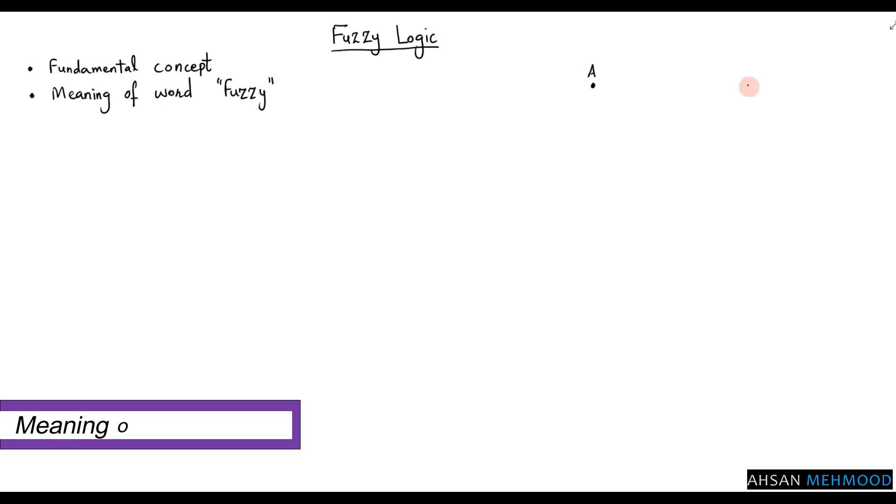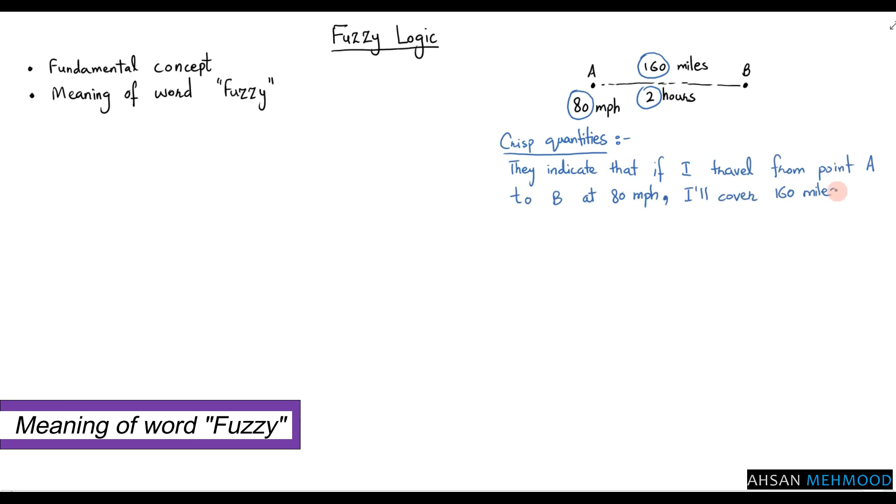Consider the following scenario. I am driving a car from point A to point B at 80 miles per hour. If the distance between points A and B is 160 miles, it will take me 2 hours to travel that distance. These quantities, that is 80 miles per hour, 160 miles and 2 hours, are all precise or crisp quantities. Crisp values or quantities tell us that if I travel from point A to point B at 80 miles per hour, I will cover the 160 miles in exact 2 hours. But in reality, it depends on the traffic situation, the road surface, environmental conditions, that is if it is snowing or if there is a sandstorm.

So in reality, if I am traveling from point A to point B and there is no traffic, it will probably take me around 2 hours to get from point A to B. If there is light traffic, it may take 2.5 hours. If there is heavy traffic, it may take 3 to 4 hours. If there is a lot of traffic, it will take a long time. These are not really exact statements. About is a vague term. How long is long and how short is short. These statements we regard as imprecise or fuzzy statements.

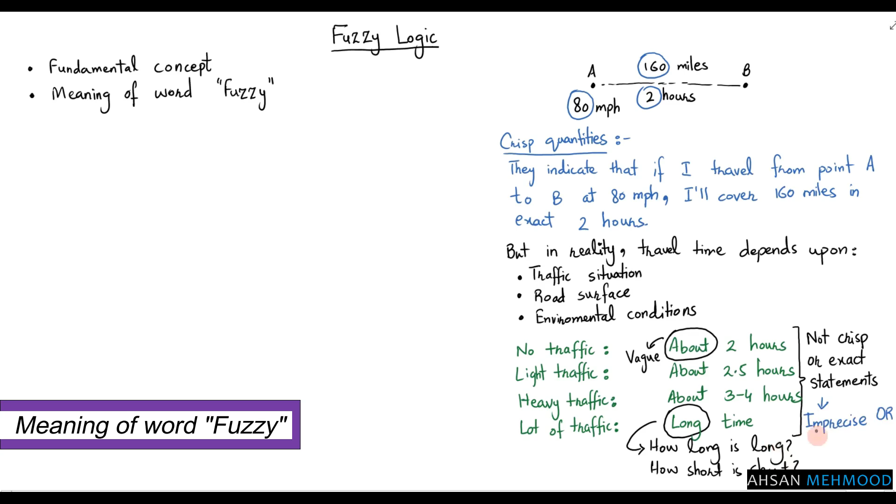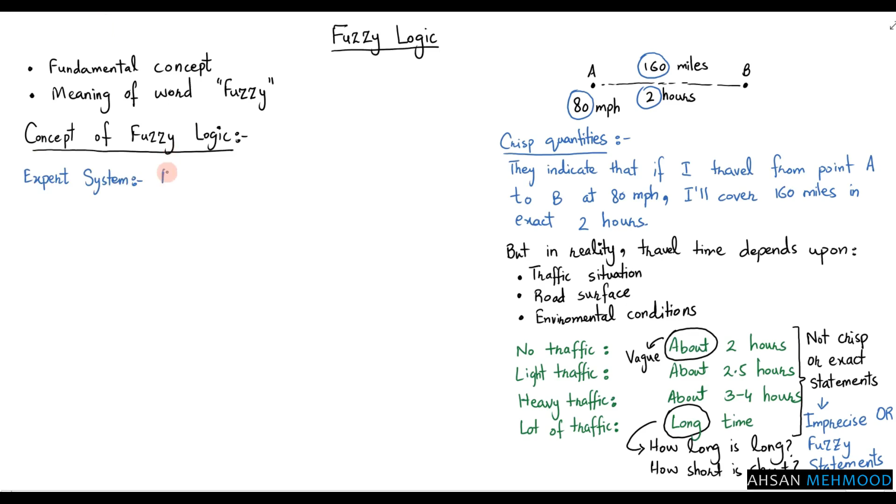Starting with expert systems is the best method to introduce the concept of fuzzy logic. In the context of control, an expert system is a computer software that mimics the behavior of a skilled operator.

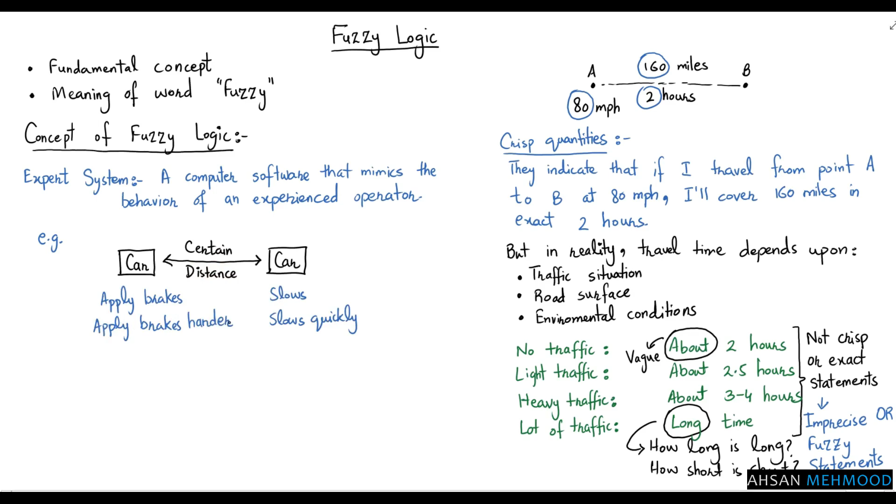For example, suppose you were driving a car and needed to keep a certain distance between your car and the car in front of you. If the car in front of you slows, you must apply the brakes. If the gap between your car and the car in front of you is shrinking quickly, you should hit the brakes more forcefully. You no longer need to model the car engine, drivetrain, or inertia to accomplish this. You know from experience that if the distance between your car and the car in front of you is shrinking, you should apply brakes proportional to that shrinkage.

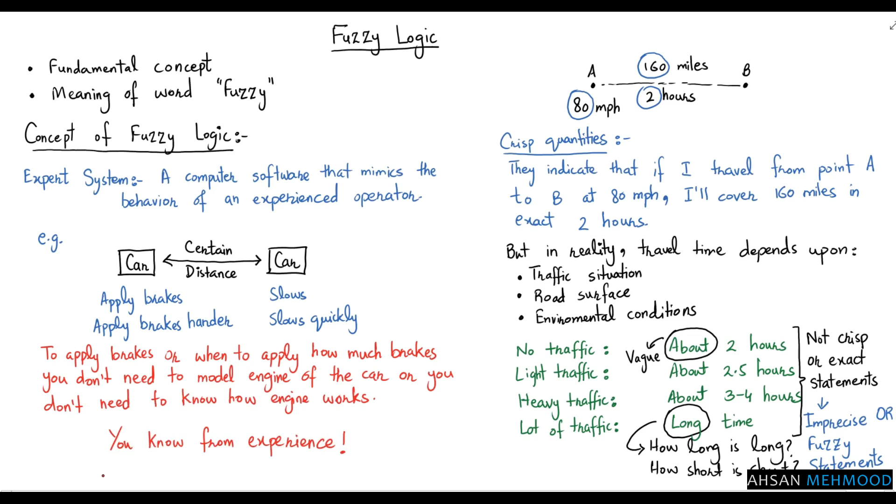Distance is one variable in this example, while the rate of change of distance is another. Your actions are based on these variables, and when you apply the brakes, you don't think about the engine model. You do it instinctively. Similarly, most processes in real life are controlled by skilled operators. Therefore, rather than modeling the car, we model the driver or experienced operator in an expert system to design the control for a system or process.

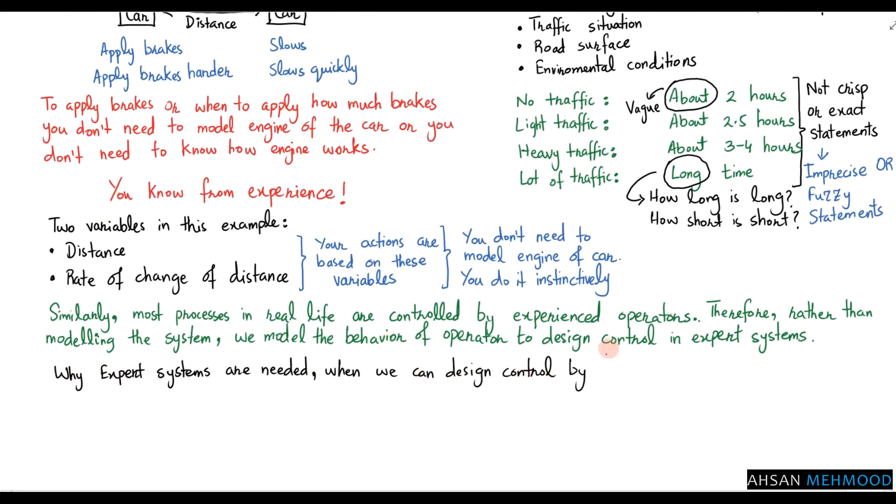Someone might wonder why expert systems are needed in control when we can design the system's control using its mathematical model. The answer to this question is that designing control for a system using a mathematical model of that system, such as a car engine, drivetrain, or other system, is not only time-consuming but also difficult to obtain in many cases. And even if it is obtained using some method, it contains errors and is affected by disturbances. Furthermore, many people lack the level of mathematical knowledge required to effectively model the system. Therefore, expert systems are used in control, in which rather than modeling the system, we model the behavior of operator.

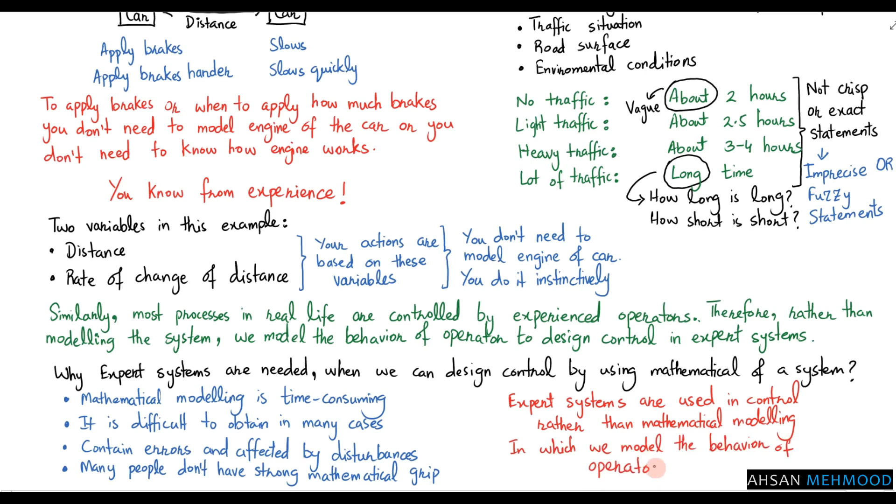So to summarize, most complex processes are controlled by human operators. Expert systems, rather than modeling the plant or process, capture the behavior or instincts of operator.

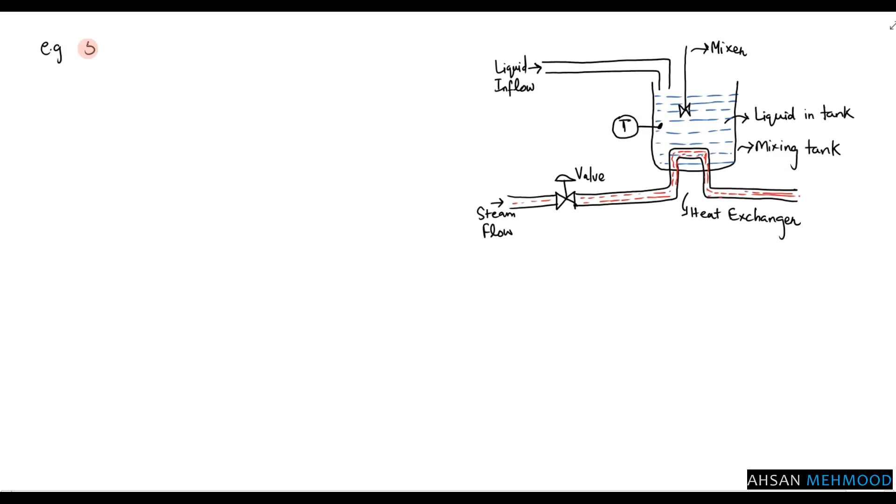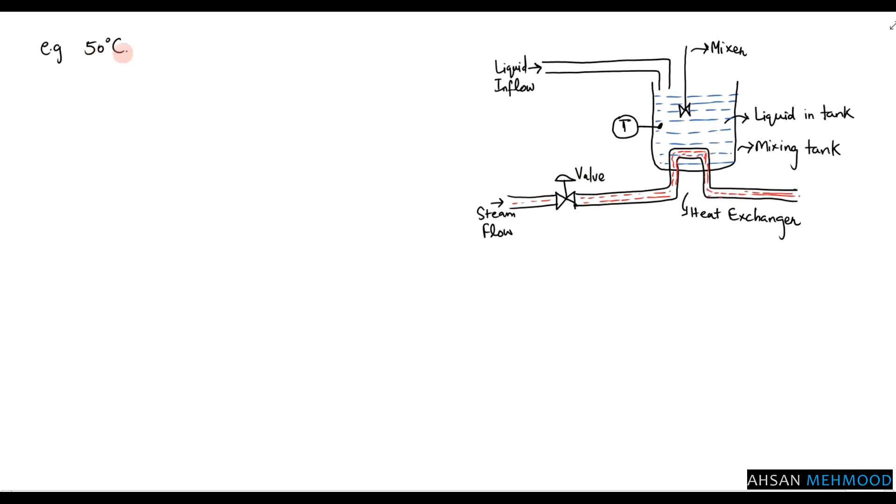I will explain this by considering an example which contains a mixing tank. We measure the temperature of the tank to keep it at a certain value, for example 50 degrees centigrade. To do so, we have steam flowing into the heat exchanger. If the temperature of the liquid in the tank is very low, we increase the flow of steam, which exchanges with cool liquid in the mixing tank, and its temperature rises to the desired value. When the temperature reaches the desired value, we close the valve.

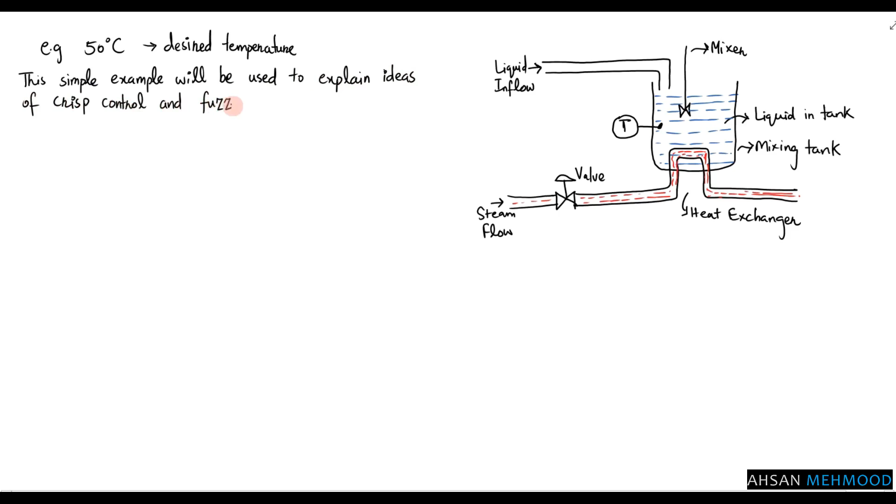In this video, we will discuss two methods of control, that is crisp control and fuzzy logic methods. And through this simple example, we are going to implement crisp control and fuzzy logic methods.

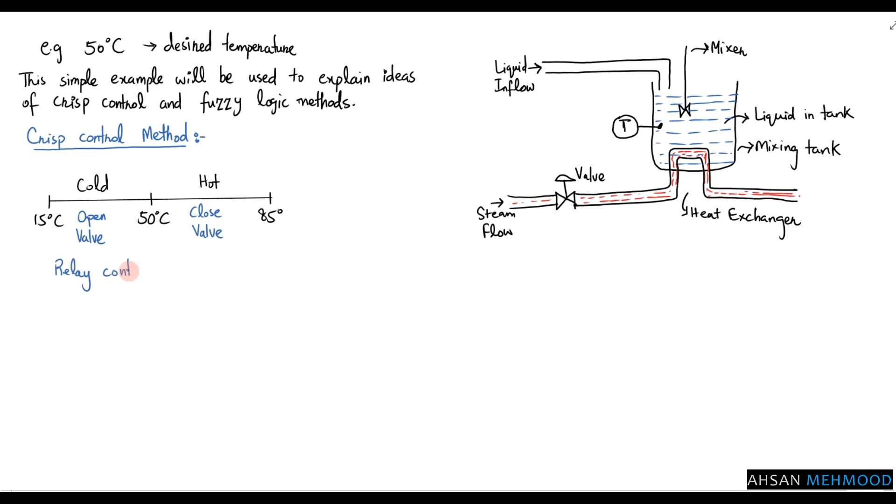Let's start with the crisp control method. If my preferred temperature is 50 degrees, I may say that anything below 50 degrees is cold and anything beyond 50 degrees is hot. If it is cold, we will fully open the valve, and if it is hot, we will fully close the valve. This is similar to our relay controller in that it has an open-close operation. These two simple statements can also be used to express this control action.

If T is less than 50, valve position is 100% or fully open. Otherwise, if T is greater than 50, valve position is 0% or fully closed. The disadvantage of such a controller is that the temperature of the tank will oscillate around 50 degrees in steady state and will not settle to a fixed value, causing the mechanical valve to wear out prematurely.

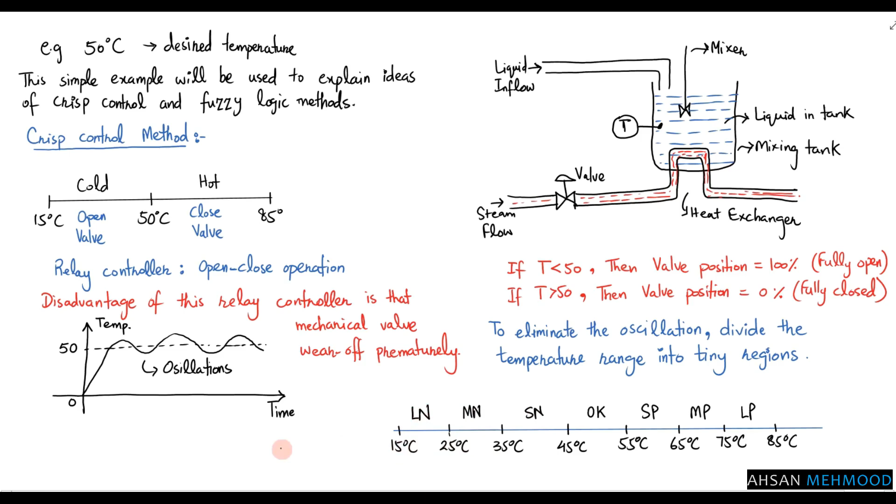To eliminate the oscillation, one method is to divide the tank's temperature range into tiny areas. For example, I can choose the 45 to 55 degrees range as the acceptable or OK range. The small positive region runs from 55 to 65 degrees. Medium positive region ranges from 65 to 75 degrees, while large positive region ranges from 75 to 85 degrees. Similarly, the 35 to 45 range represents a small negative region. Medium negative region ranges from 25 to 35 degrees, whereas large negative region ranges from 15 to 25 degrees.

In this way, we have developed a more sophisticated control strategy, in which the valve remains in its current position if the temperature is within the desired range. If the temperature is small negative, open the valve by 1 degree. If the error or temperature is medium negative, open the valve by 2 degrees, then 3 degrees, and so on. Close the valve by 1 degree if the present temperature is small positive, that is, the tank's temperature is a little higher than the required temperature. Close the valve by 2 degrees if the error is medium positive, and so on. So minus and plus refer to how far the valve is closed or opened.

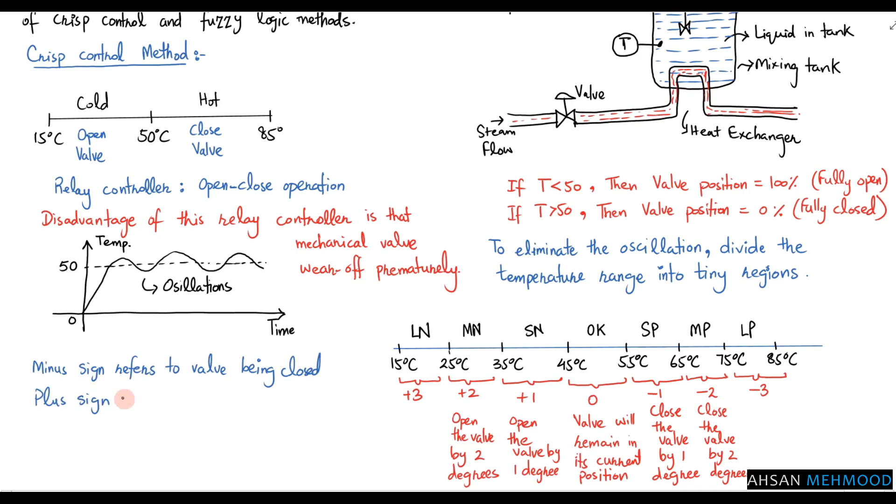Minus sign refers to the valve being closed, whereas plus refers to the valve being opened. It can also be expressed in if-then statements. In the previous case there were only 2 statements, but this case has many statements.

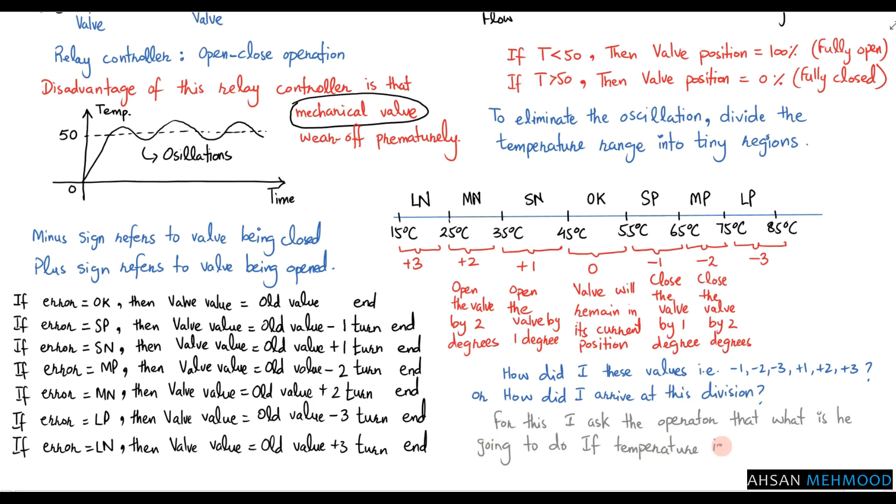In the whole discussion, our controlling variable is action on the mechanical valve. The question now is, where does this action originate? For this, I ask the operator: what are you going to do if the temperature is about 50 degrees? He will say, I am going to leave the valve alone, implying that the temperature is fine. But what if the temperature is between 55 and 65 degrees? He will say something like, I am going to close the valve by 1 degree, or minus 1. What if the temperature is between 35 and 45 degrees? He will say, I'll open the valve by 1 degree, that is plus 1.

Crisp control refers to the fact that each temperature value belongs to only one subdivision. For example, 69 degrees is a medium positive number and belongs only to this region.

By managing the degree of opening and closing of the valve, rather than totally opening or closing the valve, we may reduce the oscillations of the mechanical valve. This method is better than the relay controller method, however, it has a flaw. We will use an example to help us understand this.

The temperature of 24.9 degrees is in the large negative range, indicating a plus 3 action. Similarly, the temperature of 25.1 degrees is in the negative medium range, and the action is plus 2. So under crisp control, our controller will perform 2 different actions for 2 similar temperatures. But if you ask an experienced operator what he would do at these 2 temperature values, he will tell you that these are the same temperatures and that he would recommend only one action for both of them, perhaps plus 3 or plus 2.

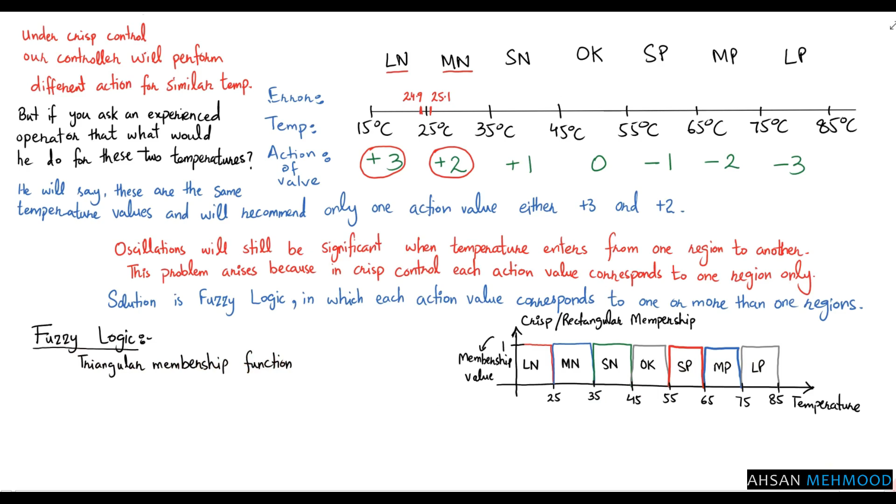Now let's have a look at what fuzzy logic is. We can also represent the previous crisp division in the form of crisp or rectangular membership functions. Crisp membership means any temperature value belongs 100% to one particular division. Therefore, each temperature has a membership value of 1 in the crisp control method. What we have learned so far is how to implement an expert system in the controller using crisp membership value.

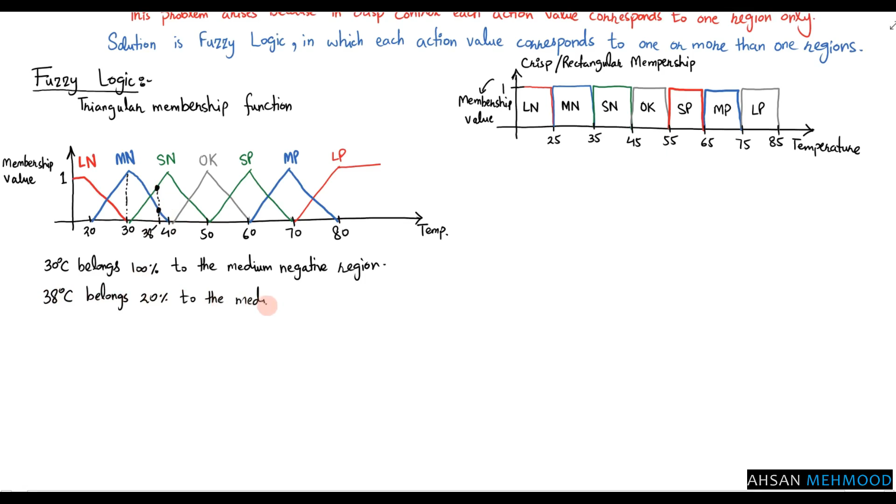For understanding the fuzzy logic controller, consider the triangular membership functions. In the triangular membership functions, the temperature of 30 degrees belongs 100% to the medium negative region, whereas the temperature of 38 degrees belongs 20% to the medium negative and 80% to the small negative regions.

Consider the case of two temperatures that were very near in values: 24.9 and 25.1 degrees. The temperature of 24.9 degrees belongs 49% to the medium negative and 51% to the large negative. Similarly, the temperature of 25.1 degrees belongs 51% to the medium negative and 49% to the large negative in the fuzzy logic controller.

In the crisp control method, if the temperature reading is 25.1 degrees, the operator would open the valve by 2 degrees. If it is 24.9 degrees, the operator would open the valve by 3 degrees. But under the fuzzy logic method, how do we calculate the action value of the valve for 24.9 degrees and 25.1 degrees, which fall into two regions?

To do so, we multiply the crisp control action value by the membership value of the triangular membership function. For example, control action for 24.9 degrees would be 0.51 times 3 plus 0.49 times 2, which equals 2.51 turns. Control action for 25.1 degrees would be 0.49 times 3 plus 0.51 times 2, giving us 2.49 turns.

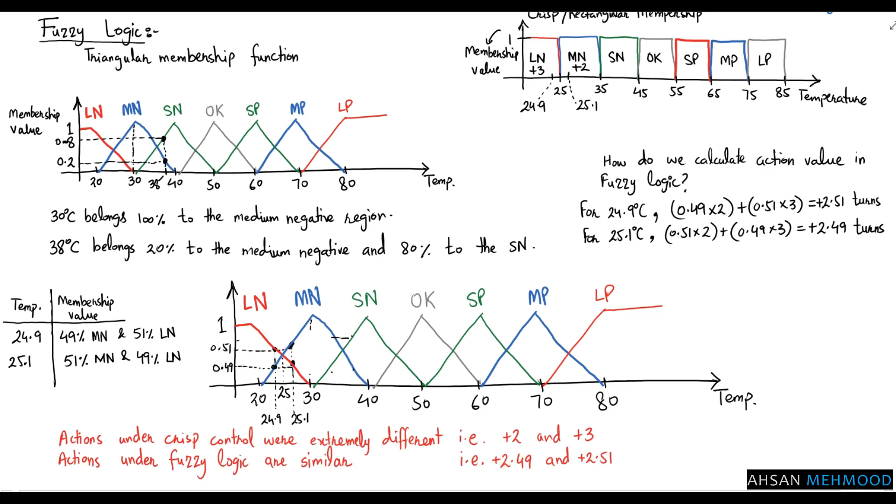Actions under crisp control were extremely different, that is 2 and 3. However, actions in fuzzy logic control are similar, that is 2.51 and 2.49. Triangular membership functions, in contrast to crisp or rectangular membership functions, give us similar actions for similar temperatures.

So what exactly does fuzzy mean in this context? In this case, fuzzy means that we enable the temperature to belong to two regions or groups instead of just one, with each group having its own membership value. For example, 24.9 degrees has two membership values: large negative 0.51 and medium negative 0.49.

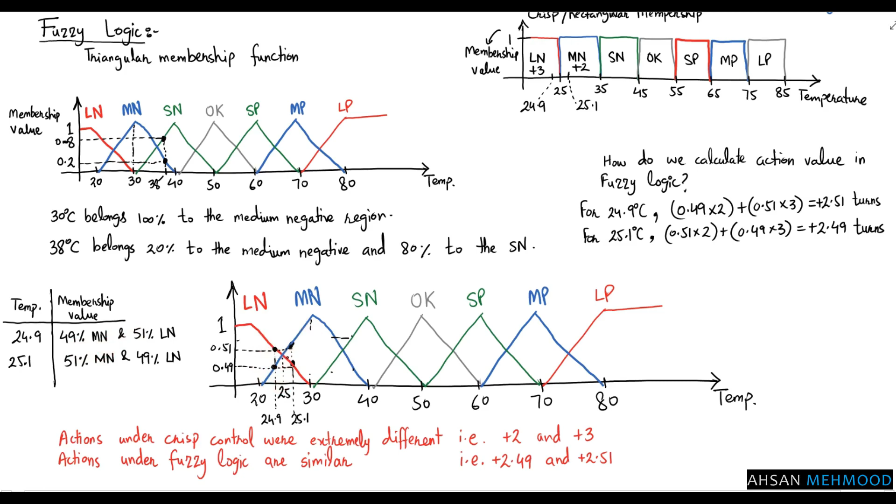These membership values were calculated here by intersecting vertical lines with triangular straight lines, solely for the sake of analysis. Computers are used to find membership values in practice, as they are difficult to find analytically.

We were able to solve the challenge of very different control actions for similar temperatures by using fuzzy membership functions, without increasing the number of rules and if-then statements. As a result, control action varies smoothly in response to temperature variations, resulting in minimal oscillations around the whole operating range.

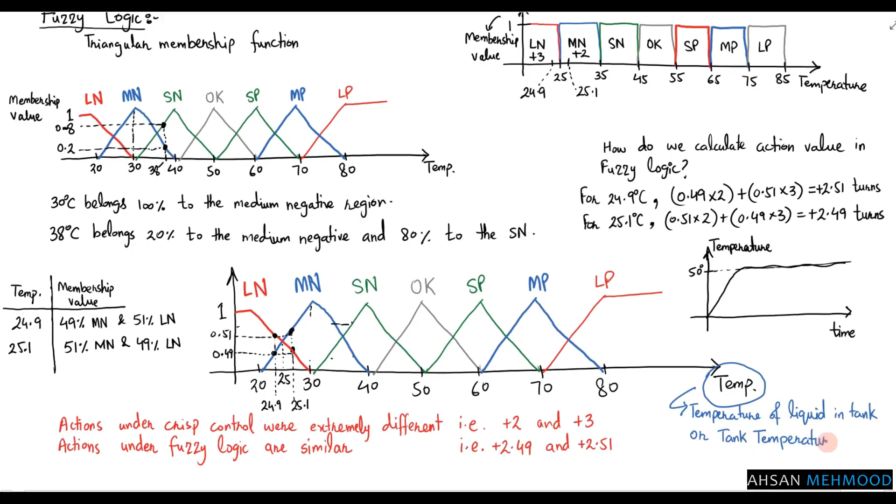So far, we have considered only one variable to decide the control action value, that is temperature of liquid in the tank, or tank temperature. While in practice, plant operators may use different variables to decide the value of control action. Now we will discuss an example in which two variables are used to decide control action.

We assumed in the previous discussion that the temperature of liquid pouring into the tank remains constant, but in reality it may vary on different days depending on external conditions. As a result, if the second variable is the temperature of the liquid flowing into the tank, or the inlet temperature, the operator may make different valve adjustments than in the previous example.

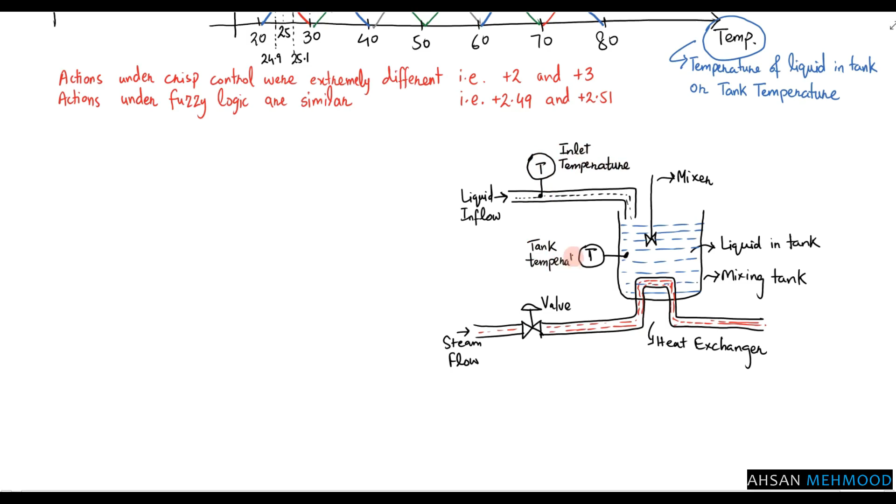If the inlet temperature is generally 15 degrees, but it is 25 degrees today, then less steam is required to raise the tank temperature. As a result, the operator can adjust the valve settings for each region as needed.

For example, if the temperature is OK, the valve position remains unchanged. If the temperature is small negative, open the valve by plus 0.5 degrees, as opposed to plus 1 degree in the preceding example. It is plus 1 degree for medium negative, whereas it was plus 2 degrees in the preceding case.

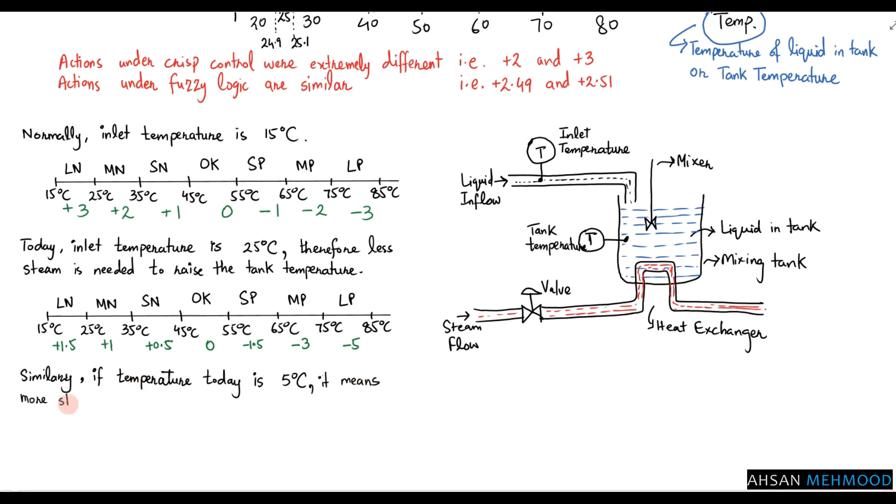If the current inlet temperature is 5 degrees, then more steam is required to raise the temperature of the liquid in the tank. As a result, the operator will alter the operation and increase the valve settings as seen here.

Because we now have two variables, namely inlet and tank temperatures, we must merge the rule bases of these variables to create a two-dimensional table.

To use fuzzy logic to calculate the value of a control action, we must first establish the crisp control values for these two variables.

To illustrate how this 2D table works for the crisp control method, suppose inlet temperature is 5 degrees and tank temperature is 30 degrees, so the action would be to open the valve by 3 degrees. If inlet temperature is 25 degrees and tank temperature is still 30 degrees, then the action would be to open the valve by 1 degree.

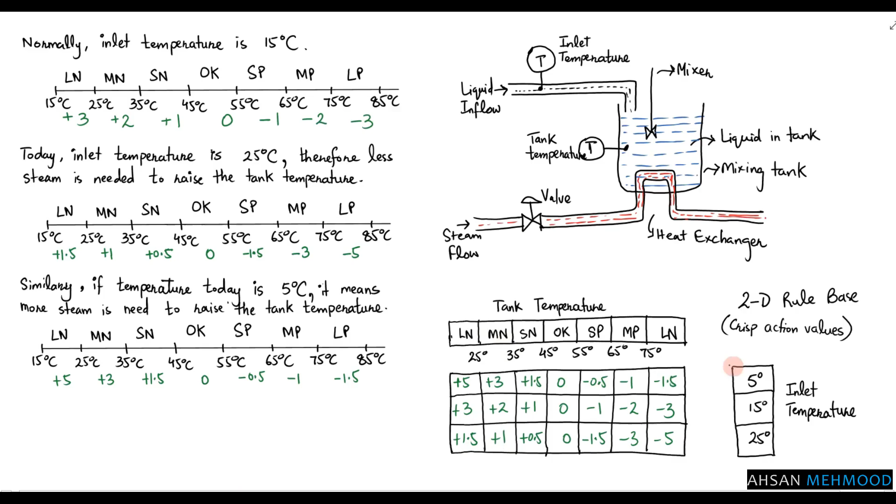Remember that we are using crisp membership values to calculate the control action of the valve, and the problem with crisp membership values is the same: for similar temperature values, the control action is drastically different, causing oscillations when the temperature value moves from one region to the next. We will employ fuzzy triangular membership functions to tackle this problem.

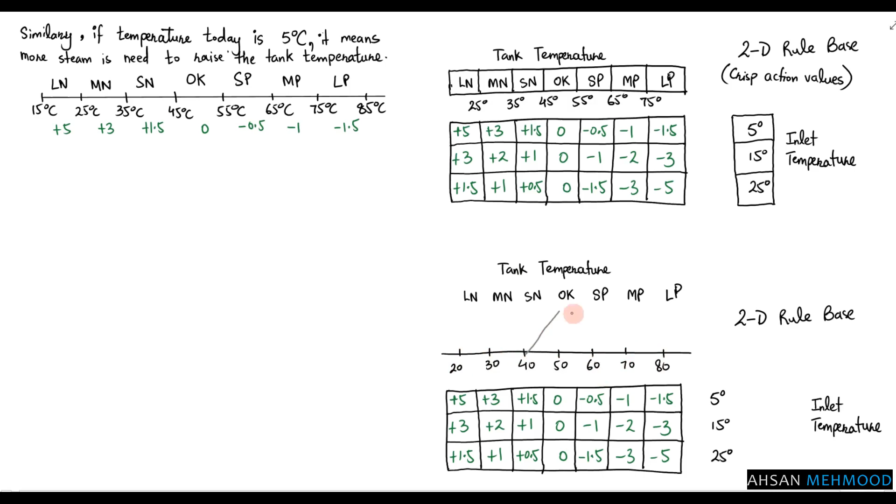For tank temperature, we utilize the same triangular membership functions as in the previous case, but for inlet temperature, we separated the entire region into cold, normal, and hot regions. A tank temperature of 30 degrees means 100% medium negative, 50 degrees represents 100% OK, and 70 degrees represents 100% medium positive.

Similarly, a temperature of 15 degrees is considered normal. A temperature of less than or equal to 5 degrees is considered cold, and a temperature of 25 degrees and greater is considered hot. The temperature in the middle has fuzzy membership values.

It was simple to decide control action value when inlet temperature was constant and these two rows were absent. For example, control action for 25 degrees is equal to 0.5 times 3 plus 0.5 times 2, or 2.5 degrees.

When we have two variables such as tank temperature and inlet temperature, the challenge is figuring out how to integrate these two temperatures to create a single control action value.

Consider the following scenario: the tank temperature is 64 degrees, which falls into the medium positive and small positive regions, and the inlet temperature is 12 degrees, which falls into the cold and normal ranges. So part of the table we need for these two temperature values is the intersection of these columns and the two rows, that is these four cells.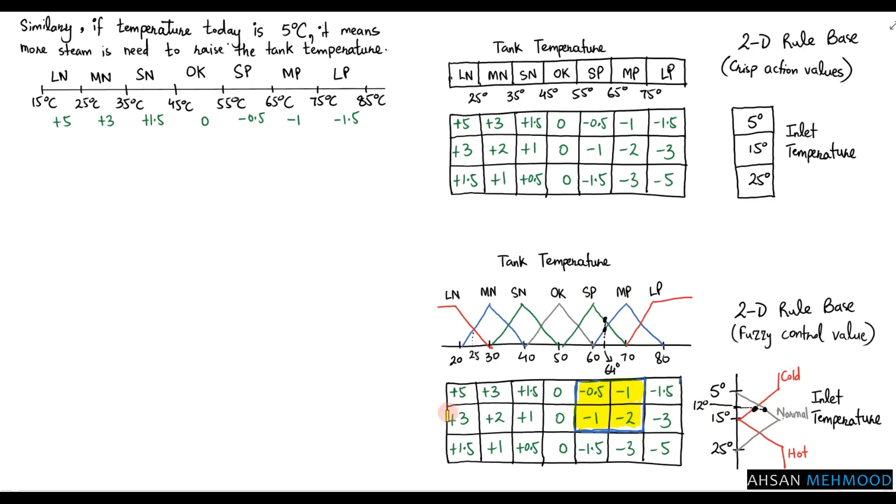64 degrees has 60% small positive and 40% medium positive membership values, while 12 degrees has 30% cold and 70% normal membership values. We can also present it in this manner.

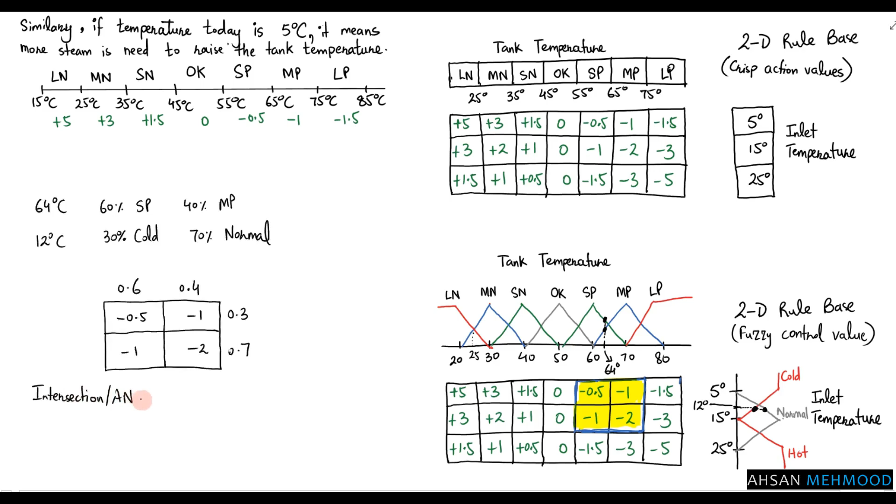So each cell has two membership values, and the difficulty is figuring out how to combine them into a single control action value. There are several approaches for solving this problem. However, we will choose the intersection or AND method, often known as the minimum weight method.

In this method, we look at each cell individually and multiply only the minimum membership value with the crisp control action value of that cell.

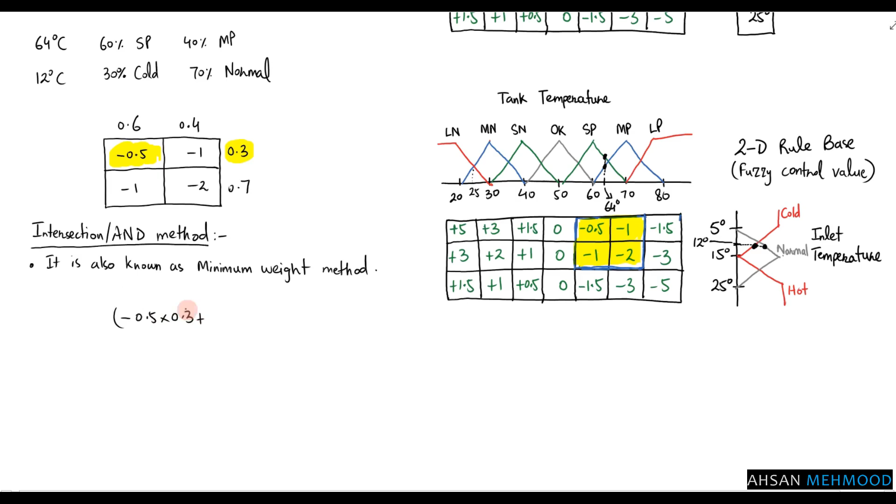For example, the minimum membership value for the first cell is 0.3. So we will ignore 0.6 and multiply 0.3 by the crisp control value, which is minus 0.5.

Then we add all of the products together and divide by the sum of membership values considered for each cell. The resulting control action value is minus 1.1562, which indicates that the valve should be closed by this number of turns.

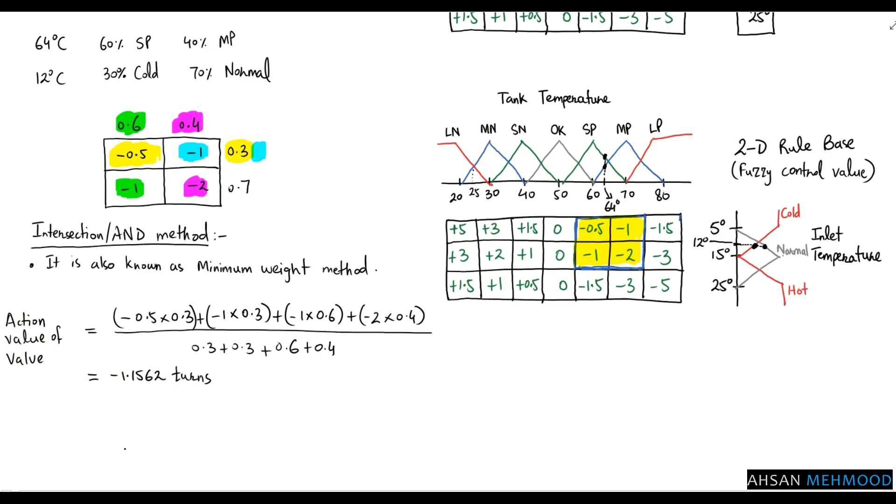Now I'll explain some keywords related to fuzzy logic. The first keyword is fuzzification, which is a process in which crisp quantities are converted into fuzzy quantities. Here, fuzzification was done when we converted crisp membership values of tank and inlet temperature into fuzzy membership functions or quantities like hot, cold, medium, positive, etc.

Fuzzy quantities do not always belong to only one group or region. They may belong to two or more groups or regions by some degrees. As a result, the topic of how to choose fuzzy membership functions arises.

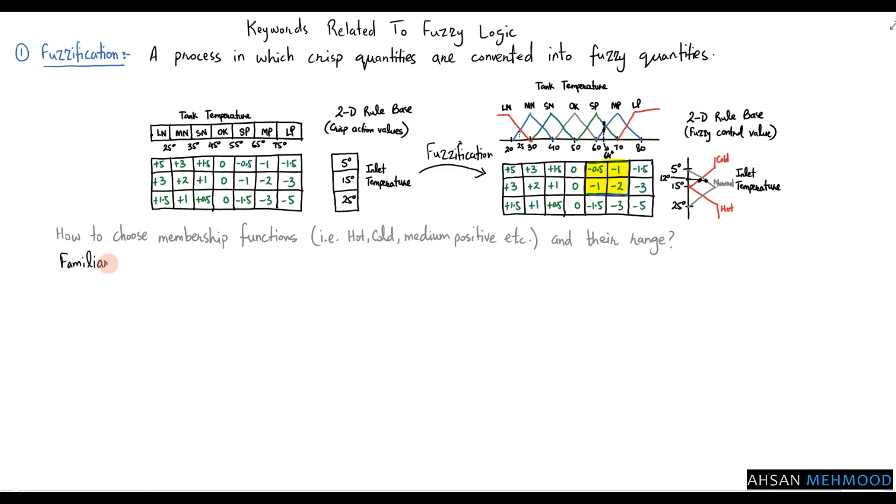To choose fuzzy membership functions for a particular process, you should be familiar with the system or process before dealing with that system and have some experience with it. Then you build membership functions for that system based on your intuition and experience.

Take, for example, the membership function for motor speed. Here, a speed of less than or equal to 500 is considered low, while a speed of greater than or equal to 2000 is considered high, while a speed of 1250 is considered normal or medium.

So how did I judge whether a speed is too fast or too slow? Because I understand how a motor works and what speed is considered normal. All of this is based on intuition and experience.

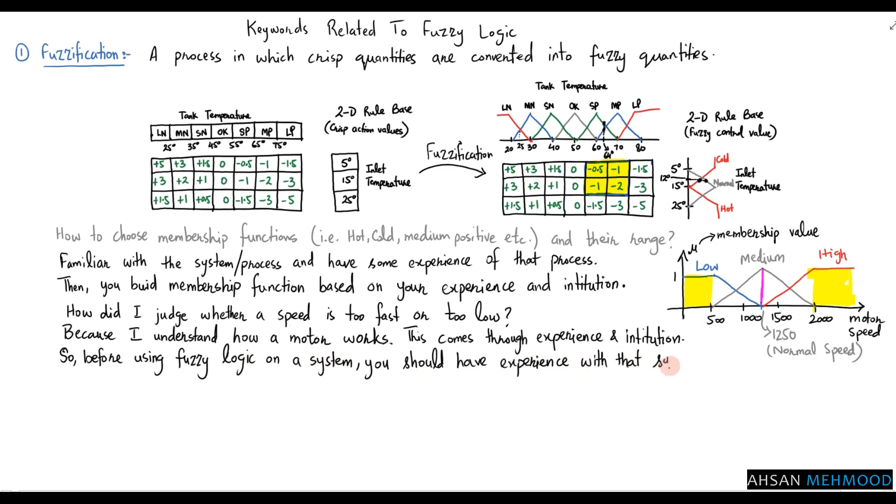The second keyword is rule base. It is a knowledge-based lookup table which contains crisp values of control action. These values also come from experienced engineers and operators.

The third keyword is inference mechanism. This mechanism is simply called if-then statements. It contains all rules or if-then statements for a particular process or system. For example, one if-then statement from the previous examples is: if tank temperature is small positive and inlet temperature is cold, then the crisp value of valve position is minus 0.5, and the membership value is the minimum of 0.6 and 0.3.

The last keyword is defuzzification. It is a process of combining all if-then statement outputs to get a value of control action. In simple words, fuzzy variables are converted back to crisp quantities in this process.